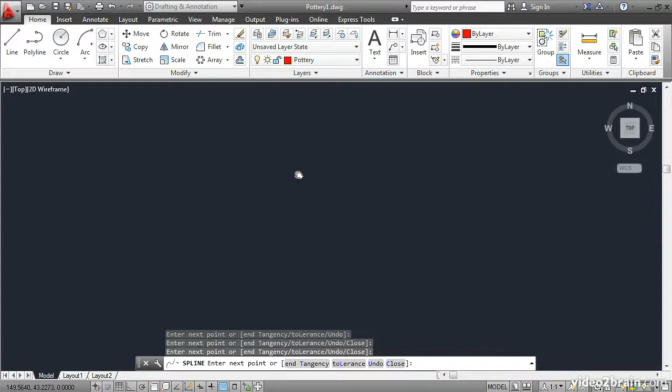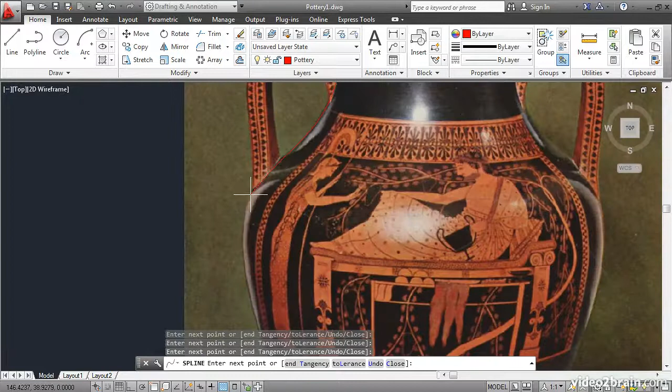Let's not worry about trying to represent the handles. Instead, we'll focus on the curve of the vase. Images disappear temporarily while you're panning. I'll pan up by dragging the mouse wheel and click some more points here, right on the edge of the vase. I'll pan up by dragging the wheel, and we'll just come down here, click a few more points.

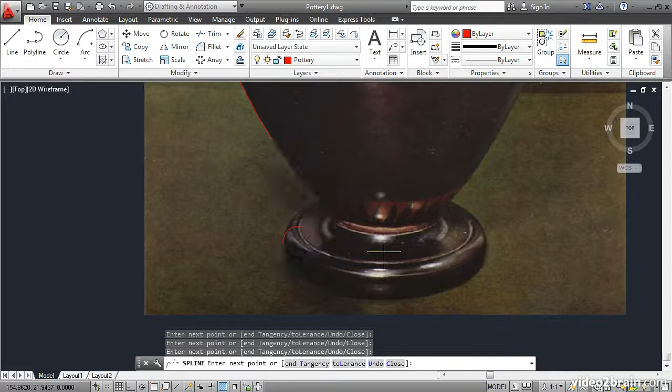Now, because this is a photograph that is underlaid in AutoCAD, we don't have a true representation of the elevation of this object. Instead, we have to kind of guess at how this base would look in perspective. I'll click about here, have it go down, and then I'll have it go over to some imaginary point here in the middle, about here. Then I'll press Enter to end the spline command.

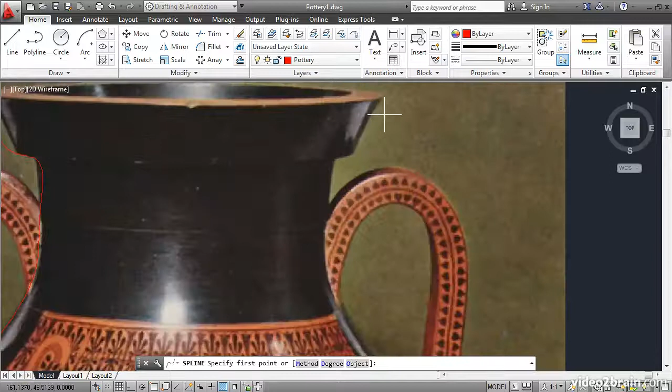I'll double-click the wheel to zoom extents, and let's try the Spline CV method on the right edge of the vase. Expand the Draw panel and click the Spline CV tool. Then zoom into the top, right edge, click the first point about here, and just work your way down.

Now this is a little bit different. You'll see a dashed white line appear. This is the spline lattice that you're drawing. The red line doesn't actually follow the curvature of the vase. Instead, it's the lattice that does. It's a series of control points that you're clicking, which are on the edge of the vase.

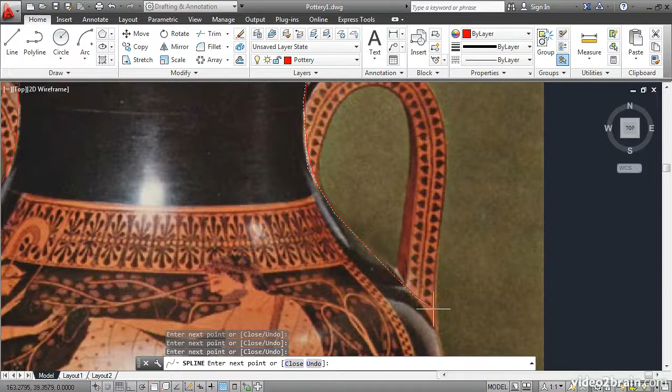So because of this, the CV method isn't the best one when you're tracing edges like this in a photo. See, the red line is inboard of the actual edge of the vase.

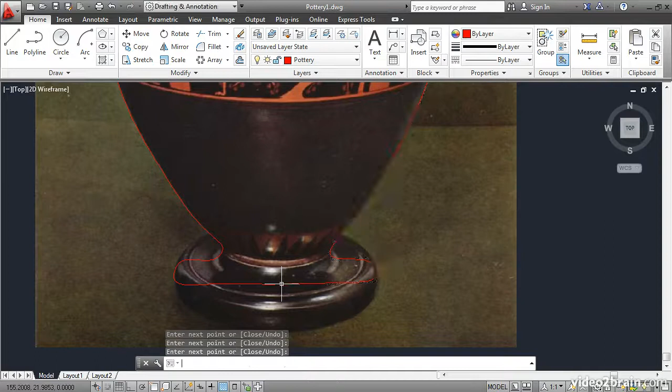I'll come down here and just complete what I started. About there, and press Enter. Now I'll double-click the mouse again to zoom extents.

Now of these two, I think I like the left spline better because it more closely matches the shape of the vase.

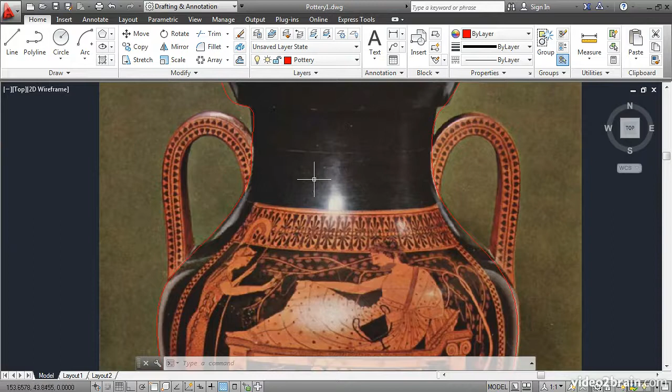Now I'll select it, and you can see the grips appear. These are the fit points, the actual points that I clicked earlier.

If you double-click the spline itself, you automatically launch the Spline Edit command. And here you can use some of the options to change the shape of the spline. In particular, I'd like to introduce a kink into the fit data. So I'll use the fit data option, and then I'll click the kink option.

As I move the cursor, you can see an X appear on the spline. I'd like a kink to appear right about here. I'll click, and the kink exists. It's hard to see that at this point, but just one click is all it takes to introduce a kink. Then I'll press Enter for exit, Enter again for exit, and enter a third time to exit the Spline Edit command. Then I'll come up here and select the object again, and I'll zoom in.

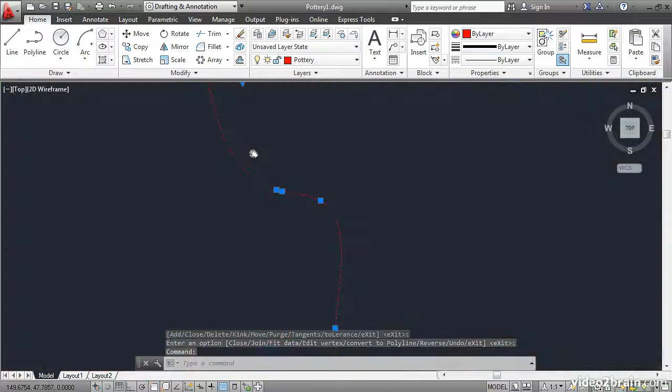You can see an additional fit point exists right here. That's the knot. I'll stretch this point by clicking on it and moving it. And now we have a curvature discontinuity here, and that's also known as a kink. This allowed me to have this sharp edge.

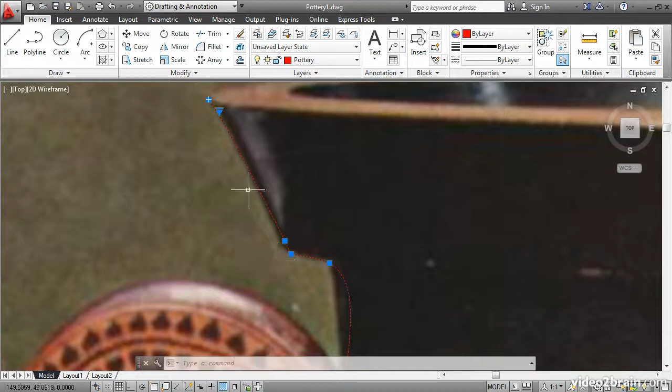Now, I could more closely match these fit points to the shape of the vase just by moving each fit point one at a time. But there's a more efficient way to do this, and that is to use this multifunctional grip to change the spline from a fit spline to a CV spline.

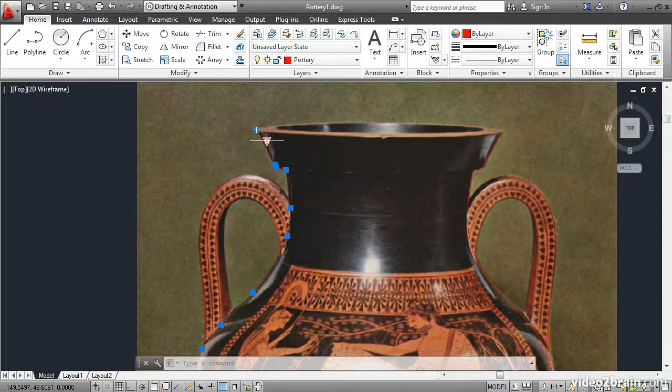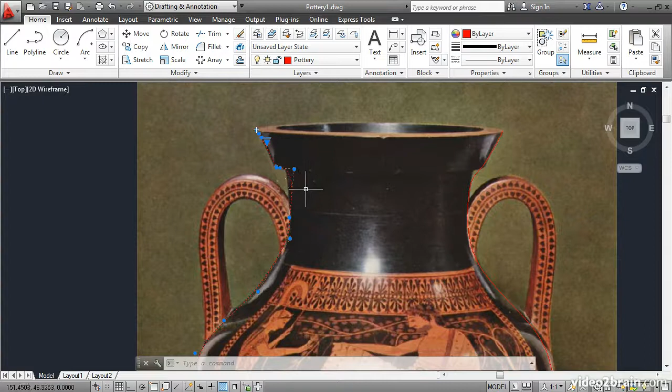When you do this, it doesn't change the shape of the existing spline. It merely changes where the grips are located. Now we have a CV spline. It works the same as this other one over here. But we shaped it initially using fit point method.

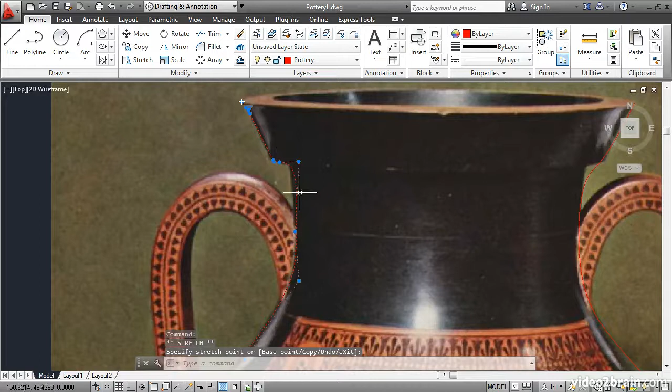Now I can come in here and move these CVs around, and it gives me additional finer control over the placement of the curve. I can move these around, and by positioning them just so, I can try to match the curvature to the vase. Now here I can't quite get it right. It's not really wanting to curve as much as I'd like it to.

And so what I'll do is double-click on the spline to launch the Spline Edit command. And this time, I'll use the Edit Vertex option. And then I'll use the Weight option.

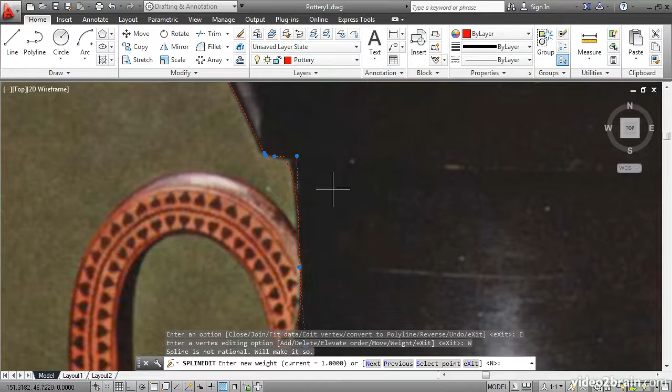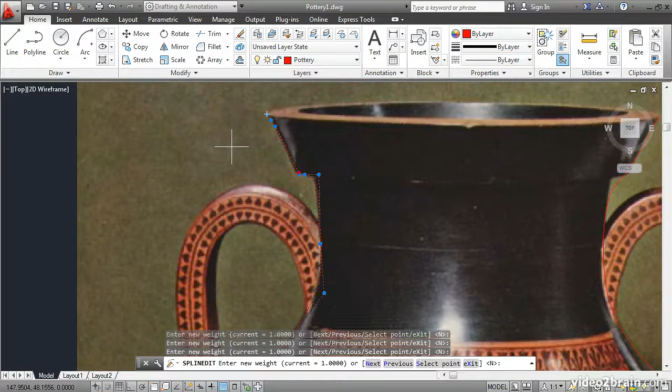To change the weight of a particular CV, you have to first select the CV, and you do this sequentially. The default option here says N, which means next. So I'll just press Enter, and this CV is highlighted. Press Enter again, the next one is highlighted. Keep pressing Enter until you get to the CV that you're interested in, namely this one.

Zoom in, and then you can enter a new weight value. All the CVs start with a weight of 1 by default. Let's try a weight of 2. I'll just type in 2, Enter. And you can see that the spline is pulled closer to the CV.

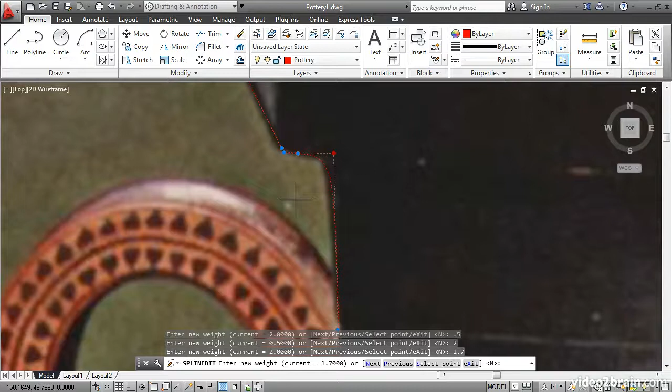If I enter a weight of 0.5, the spline is pushed further away from the CV. So in this case, it looks like a value of maybe 2 or maybe 1.7 would be better. It's a little bit closer to the curvature here in the photograph. So in this way, you can really dial in your spline object to match just about any curved surface.

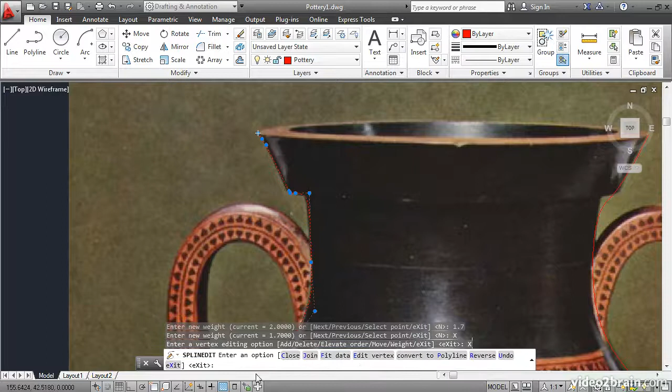Now to get out of this command, we have to use the Exit option, which is not the default. And then again, Exit, and exit a third time to get back to the command line.

In this lesson, you have learned how to create both fit point and CV splines, and have understood their differences and particular advantages. In addition, you used the Spline Edit command to create a kink at a chosen point and added weight to a particular CV.